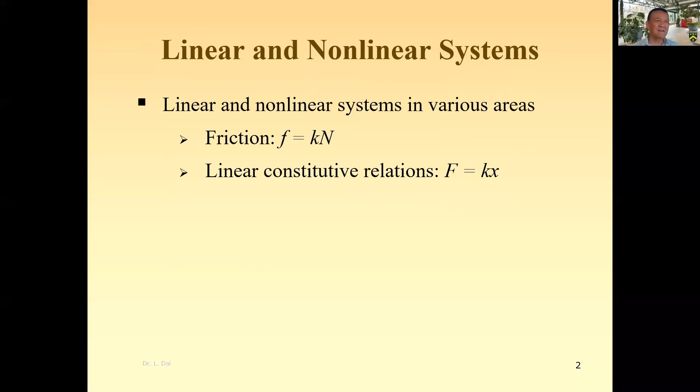Compared with the linear relationship, this one is nonlinear because we have x to the power 3 there, and you can have x to the power 5, etc. That's the nonlinear relationship, which is closer to reality. There are a lot of linear relationships in scientific and engineering areas, such as thermal expansion and the equation of motion, etc. But the fact is that our world is nonlinear. A nonlinear relationship, as shown by this equation, would be closer to reality, to nature.

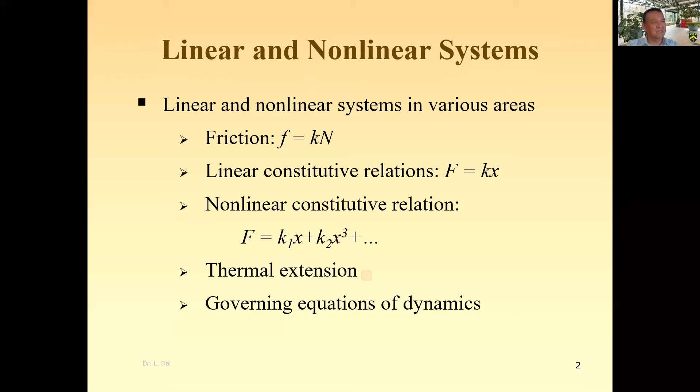Okay, so what kind of relationship may we have between a linear system and a nonlinear system? Say this is a pendulum. We call it the simple pendulum because we have a rope here with length L, and we consider that the mass is concentrated at this point. So we consider the mass at this point M, and we treat this object as a particle. That's the simplification and assumption.

I say all the mass is concentrated at this point, and the length of the rope will not change during the motion. You see, this one will be oscillating this way, right? Okay, so everybody has seen that, but you may probably have seen some clock like that.

However, if you want to describe this motion accurately, in a mathematical manner, then we probably need to find a relationship. For that relationship we can use Newton's second law. Newton's second law is F equals ma. We all know that. And graphically, we can describe Newton's second law in this manner.

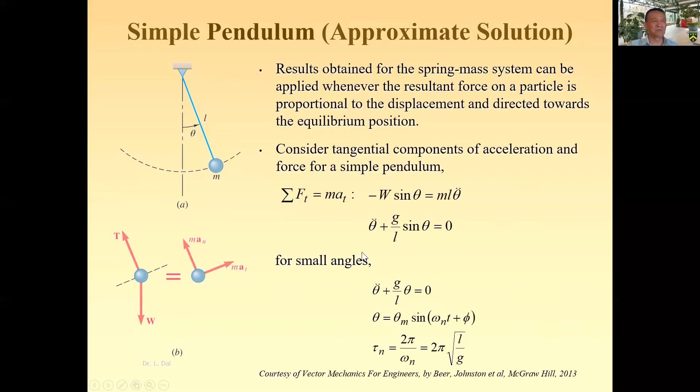So what people would do, they would say, well, this is nonlinear, I don't like it. Let's make it linear. That process is called linearization. When theta is very small, we can approximately assume that sine theta equals theta. A lot of people accepted that, although that's an approximation. So we change sine theta to theta by assuming theta is very small, and then we have a linear equation. With the linear equation we can find the solution and the period of motion, since this is a periodic motion. Everything is beautiful, nice.

Okay, let's ask a question. Why do you want to change the nonlinear system to a linear system? The reason is that a nonlinear system is difficult to solve. The next question would be, you said when theta is a small value, sine theta is approximately equal to theta. So how small must theta be for us to call it small? Is 5 degrees small? Is 6 degrees small? Is 10 degrees small? That is not certain.

Another question would be, what if the angle is not small? Then the answer is, if the angle is too large, we don't know how to solve it completely. That is the difficult part. At this stage, believe it or not, we do not have a very good mathematical way to analytically or completely solve those kinds of nonlinear systems.

Then people will say, what's the difference between linear and nonlinear? Would it give us a different response if we have a nonlinear system, or a very large angle theta? Yes. The response of a typical linear system is periodic, something like that. So we can have a solution like what we had previously.

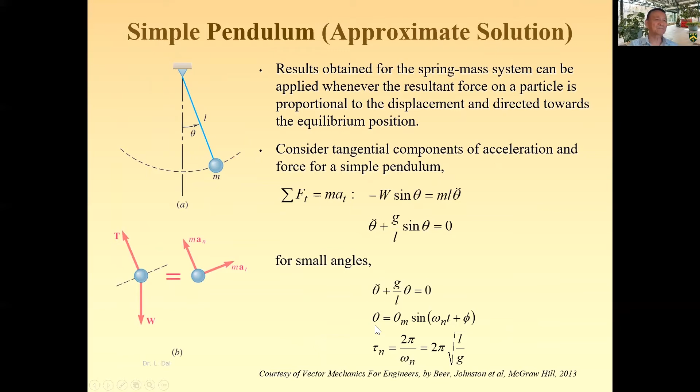That's a periodic solution. In other words, once you give me a value t, I can find the corresponding theta for you. That implies we know the response of the system completely, and I can predict what will happen next second, next hour, next day, or next year. Everything is predictable. However, with a nonlinear system, the response can be something like this.

That is what we call chaos, a chaotic response. It's not very periodic; strictly speaking, it's not periodic at all. So that is what we call a chaotic response or chaotic phenomenon. Actually, chaotic phenomena are around us almost everywhere. For example, hurricane forecasting, saying we expect the hurricane will go in this direction along this path in the next 4 hours.

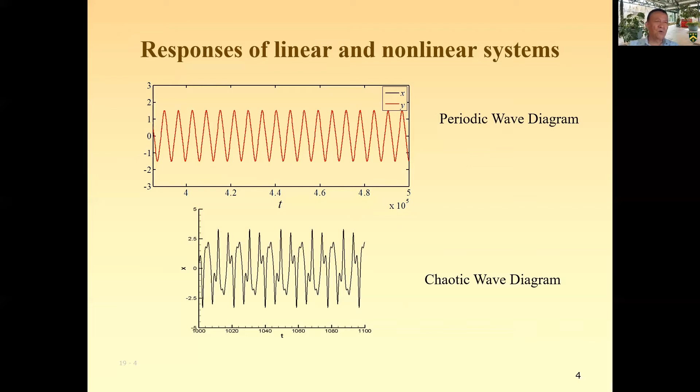That is not an accurate prediction. And for longer time, let's say the next day, for example, we can hardly predict it because there are nonlinearities involved in it. The system, the weather system, is nonlinear. So therefore, we need to find how we define those so-called nonlinear phenomena. What are the characteristics of nonlinear phenomena, especially chaos or chaotic response?

So there are a few conclusions that I can give you. By far, people know that. The first thing is that a nonlinear system is hard to predict. Okay, and that's what I have said. Because we do not have an analytical solution, we cannot solve nonlinear systems completely or analytically. That's the difficult part, and therefore we do not completely understand or comprehend the phenomena or the mechanism of the nonlinear system, unfortunately.

Second thing that I can say, a conclusion that everybody in the field agrees on, is the sensitivity of nonlinear systems to initial conditions. That means a slight change of initial condition will completely change the response of the system. That characteristic is now known as the butterfly effect. People say it this way: the flap of a butterfly's wings in Brazil sets off a tornado in Texas. The butterfly effect is now widely used everywhere, and especially politicians like to use it.

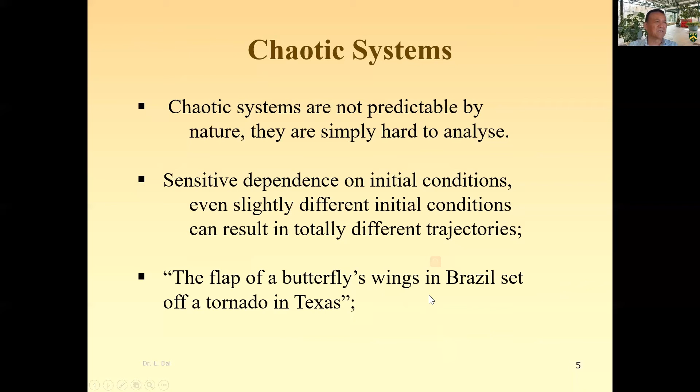So that's the chaotic system, and it gives us those conclusions: not predictable and very sensitive to initial conditions. There are some other phenomena that we may discuss later, or you can find them in the corresponding publications. So what I would like to do is look at how we solve those nonlinear systems. Although we can hardly solve them analytically, can we solve them semi-analytically? Or can we solve them numerically with higher accuracy? That's the part of my research.

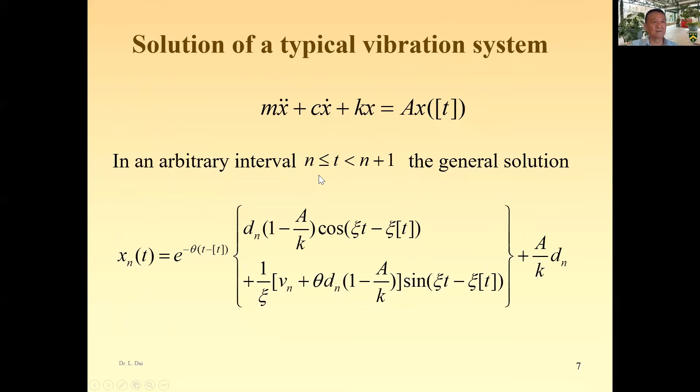And then if I have the initial condition, let's say initial displacement and initial velocity, then I can find the solution completely for the system over the time horizon that we are expecting. It doesn't matter how large that time horizon is. So then we can solve it.

That's an idea. So now if we have a nonlinear system, I thought about how we can use a bridge to connect those two systems. One is a piecewise linear system, the other is a continuous system. Continuous systems widely exist in our world, right? So what I thought was, why don't we have this kind of mathematical description, saying that [Nt], where the square bracket represents the greatest integer function. I don't want to bother you with that terminology. Just say it changes it to be an integer.

Okay, that's an integer over another integer, although this n may not necessarily be an integer. Well, let's assume it's an integer. And then t is time. If we have this, then we can prove this is true when n approaches infinity, and this relationship is true.

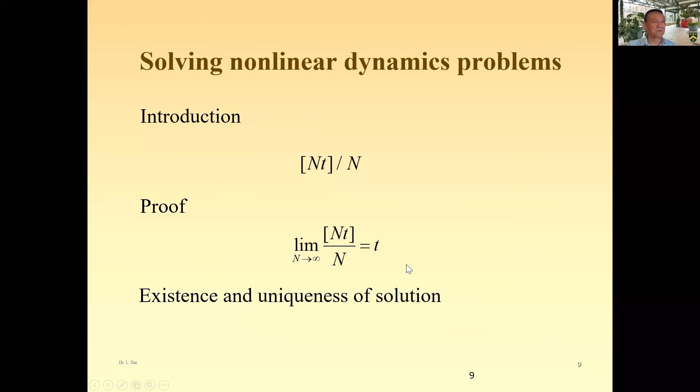So remember, this is an integer, a piecewise constant. Let's say 1, 2, 3, 4, those kind of integers. And then when n approaches infinity, we have this relationship. Well, bingo, this is a good relationship. And actually, we may use this relationship to bridge the piecewise linear system and the continuous system. That's something we can take advantage of. This has been proved mathematically in one of my books.

Okay, now let's say I have a nonlinear dynamic system. As I said, this is a typical equation describing vibration or oscillation of a system. Let's say G, this function, is the nonlinear part of this equation. Let's not bother with it at this time. We just describe how we solve this nonlinear governing equation. Again, in the tiny time interval, I may change this system into this system and get everything in terms of time t.

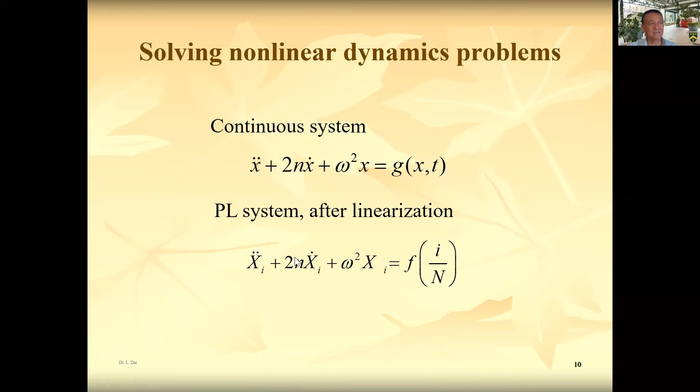The purpose of doing this is that in the tiny time interval, we change this nonlinear system into a linear system. Then we can probably solve this linear system completely inside the time interval. That's the idea. And indeed, we can find the solution in this manner. It's a little bit complicated in mathematical format, but it's not that difficult, trust me, okay?

And this G can be a square matrix, or a matrix which is not necessarily symmetric. Let's not bother about it; we can find the solution anyway, in this format. In other words, the nonlinear system can be solved by this approach, with the piecewise linear system that we managed to write in that form.

Here, let's say R is an integer and G is a matrix, actually a matrix to the power of something, right? And when n tends to infinity, that power tends to infinity. So although this solution is given in this format, it is hard to do the operation. What do we mean by operation? You can hardly do integration. You can hardly do differentiation, those kinds of operations commonly seen in calculus, which are very useful.

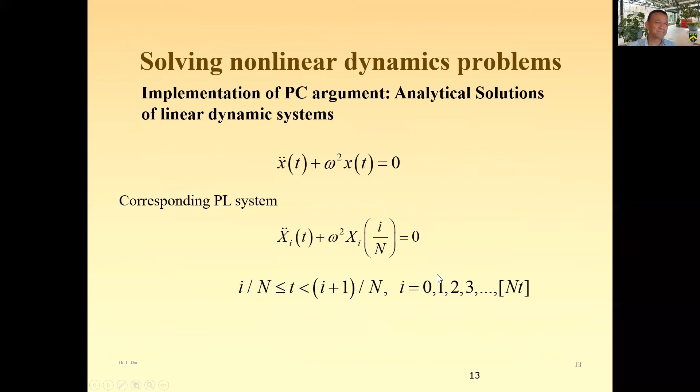Let's have a look. In the tiny time interval, as we said, we can change it into this form, and t changes to be a constant. This is a constant. I is a constant. N is an integer, right? Then we can solve it in this form. Again, there's a matrix to the power of nt. As I said, n can be infinity. That means we have an infinite number of matrices multiplied. That will be very complex and time consuming, right? So we've got to do something there.

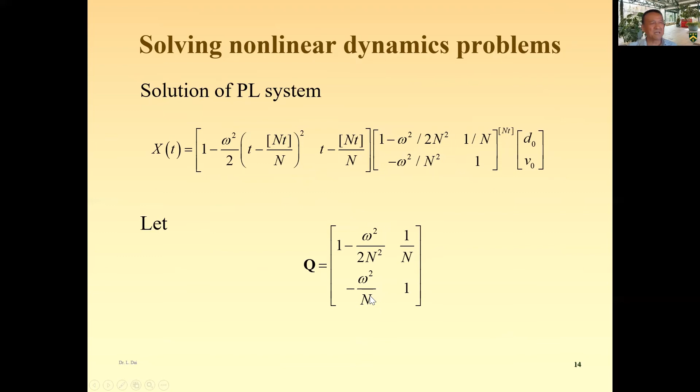Actually, this D is a matrix with the eigenvalues on the diagonal. And what is E? E corresponds to the eigenvalues; this is the eigenvector matrix. And E to the power of -1 is the inverse of the eigenvector matrix. Those are just mathematical changes, and we can easily do that if you are familiar with matrices.

And if that's so, this troublemaking nt, the power, can be moved inside, as you can see. So then we do not worry about the infinite number of matrices multiplied together. So that's the beauty of this kind of operation.

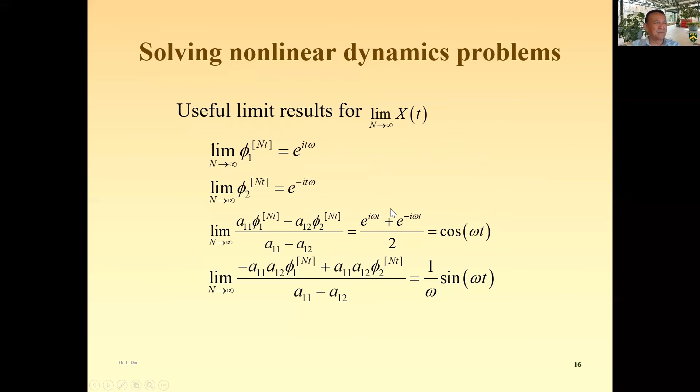And then I found that there's something interesting. If you are interested in this, you may probably find that this is interesting too. We can rewrite it into so-called Euler's equation. That's the most beautiful equation, people are saying, in the world. I don't know why it ends up with this kind of mathematical description. However, it's describing the oscillation and the vibration of the system. And we need to further study the physical background of this kind of description. Anyway, when n approaches infinity, we have a lot of interesting results generated.

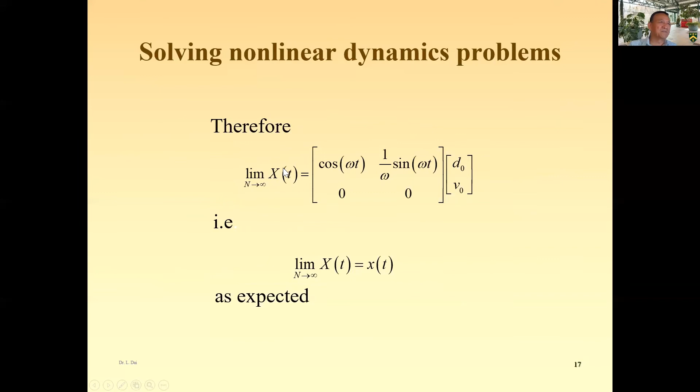So then let's get back to our original problem. We solve the linear system completely and analytically. When we let n approach infinity, we can prove that the piecewise linear system tends to be the continuous system solution. That's what we were expecting, and that means we can use the piecewise linear approach to find analytical solutions for linear systems through the approach that we just described. And this is a completely new approach. We can find the same solution, which is good.

That made me think, well, why don't we use this method to solve nonlinear systems analytically and completely? Unfortunately, I am not successful yet. I have a team of students working on that, and we're still trying very hard, striving to get a solution. We're working on it.

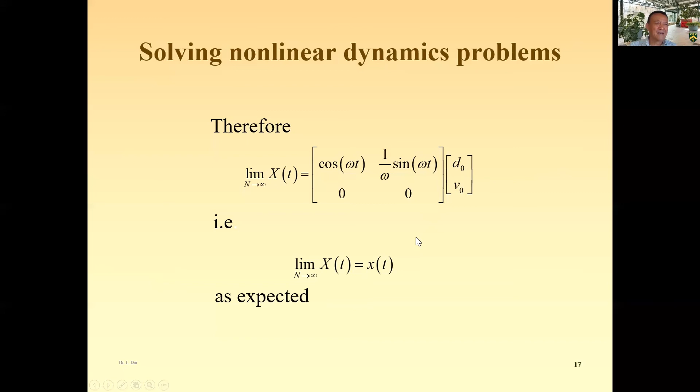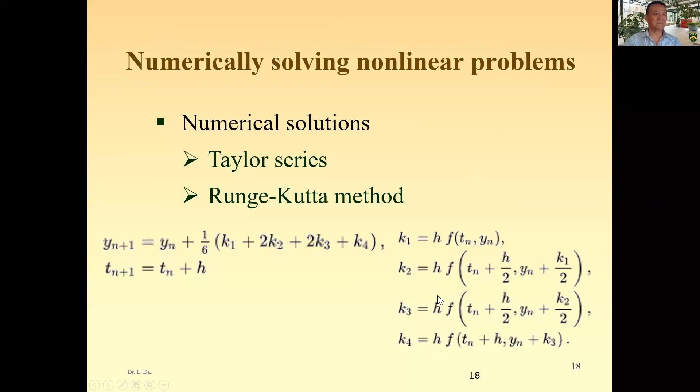However, although the analytical solution is very difficult to find, the numerical solution can be found without too much difficulty, because we have so many numerical methods to solve those nonlinear systems. One of them, probably the most popular numerical method, is the so-called Runge-Kutta method, and that's an extension of a Taylor series. Very popular, and if you are familiar with MATLAB, you can find the Runge-Kutta method.

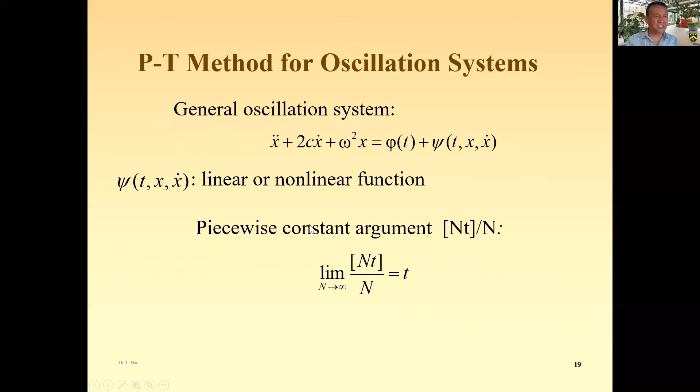However, if we use the piecewise linear approach that we discussed previously, combined with the Taylor series, we may probably get a better solution. So how do we do that? Let's say a simple nonlinear dynamic system like that, and on the right-hand side we have a function of t, or a function of something very strange, nonlinear anyway. By using the bracket that we just described, we can find the solution that we need. The idea is the same: inside a tiny time interval, we find a linear system, we solve that linear system, and then combining all those systems together, we find the solution.

Indeed, for a numerical solution, we always need to find the recurrence relationship in the time interval. On the left-hand side we have a value given, we put it in, and we can find the solution for the next point in the time interval. This way we can find the solutions for linear and nonlinear systems. As I said, for many linear systems we can find the complete solution. This is an example: I found a solution for a linear system by using the approach I just described, and we call it the PT method. P stands for piecewise linear, and T stands for Taylor's expansion.

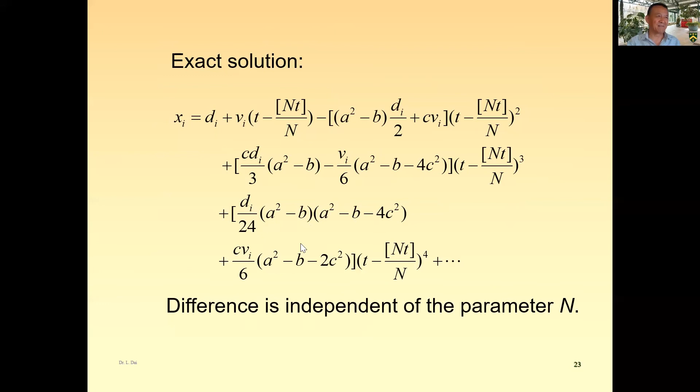Let's say this one: the PT solution gives you everything the same, except that this part is a squared minus b over 2 minus 2c squared, and the exact solution would be a squared minus b minus 2c squared. Everything's the same, except that this one is very small. Also, t over n is a value smaller than 1, let's say 0.1, and to the power of 4, 0.0001. That's very small. In other words, the PT method gives you an approximate solution; the numerical solution is an approximate solution, not analytical, not a complete solution. But the accuracy of the PT method is very high. Let's see how high it is.

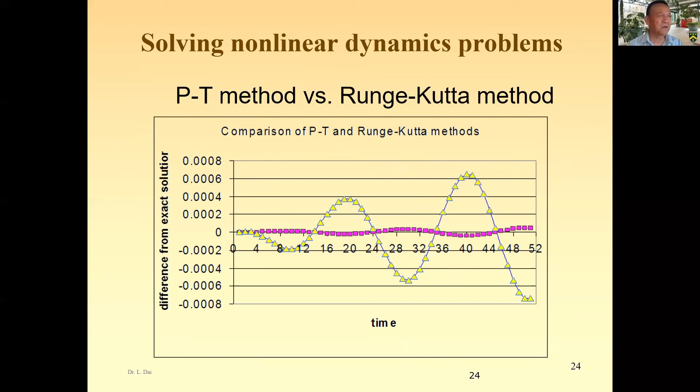As I said, the Runge-Kutta method is one of, if not the most popular numerical method. We compare the PT method with the Runge-Kutta method and look at the error. The purple square represents the error of the PT method, and the yellow triangle represents the error of the Runge-Kutta method. Both errors are very small, you can see, 0.0008. However, comparing the two errors, the PT method gives you a solution with much higher accuracy than the Runge-Kutta method, which is the most popular one. We're excited about it. However, that's a linear system, and you know the solution. What if we don't know the solution, for a nonlinear system? Let's have a look.

Say we use the PT method, we use the bracket, everything the same. And for the nonlinear system like that, and by using the Runge-Kutta method, we do the comparison. Comparison would be a little bit difficult if you don't know the solution. But we can say when we have the time interval selected for numerical solution very small, the accuracy of the solution would be higher.

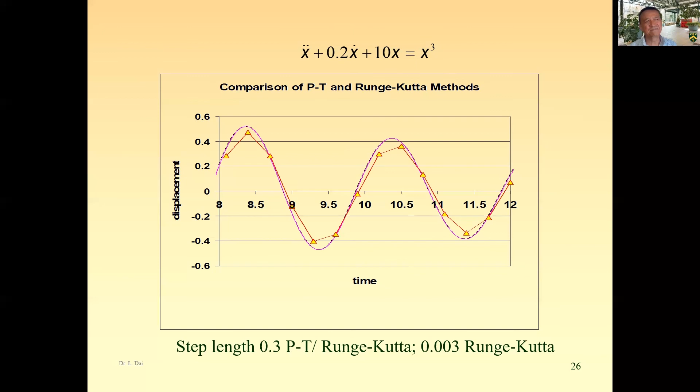And research obviously plays a great and important role at our university and at all the universities. And if you are interested in this topic, or you would like to do research along this line, please contact me. Okay, that's all for what I need to say. And please enjoy the study and research at the University of Regina.